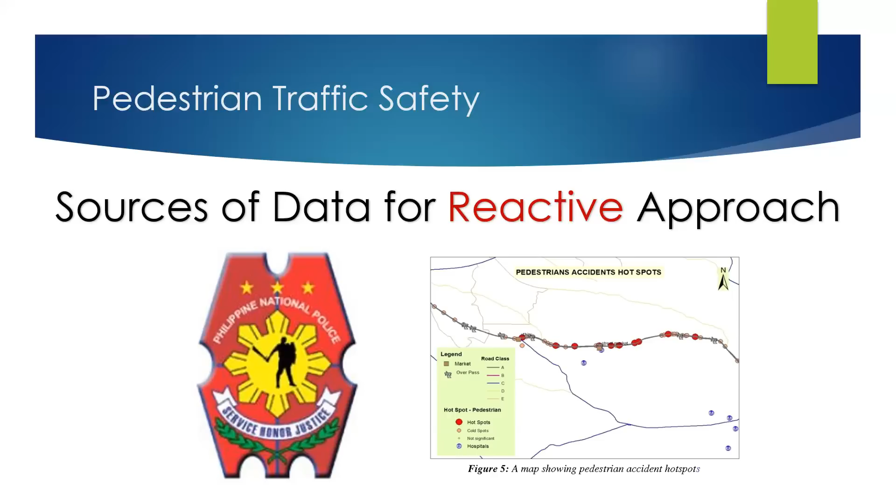However, there are some disadvantages. For one, they are considered historical data, which means they take time to build up. You can't make a study if there are many accidents only now and you want to see the trend, but it only happened this year. You have nothing to base your studies on.

And accidents are rare occurrences. It's possible that this year you have 5 accidents in the same area, but 1, 2, 3 years before that, nothing happened. So it's hard to come up with a decent study involving that area.

Because no accident really happened, or accidents were irregular in that area. Some accidents go unreported. This is not uncommon; it's pretty common even in remote places or even abroad.

So if an accident can be resolved on the spot, syempre yung police hindi na nila papakialaman yan. So pwede na nilang sabihin na sige, bahala na kayo, just resolve it on your own. So at least yung iba kasi ayaw nila magkaroon ng record dun sa police. And then yung iba rin, ayaw na nilang ma-hassle. So kung pwede na nilang i-solve on the spot, they will do that. They will know there's no need to call for police.

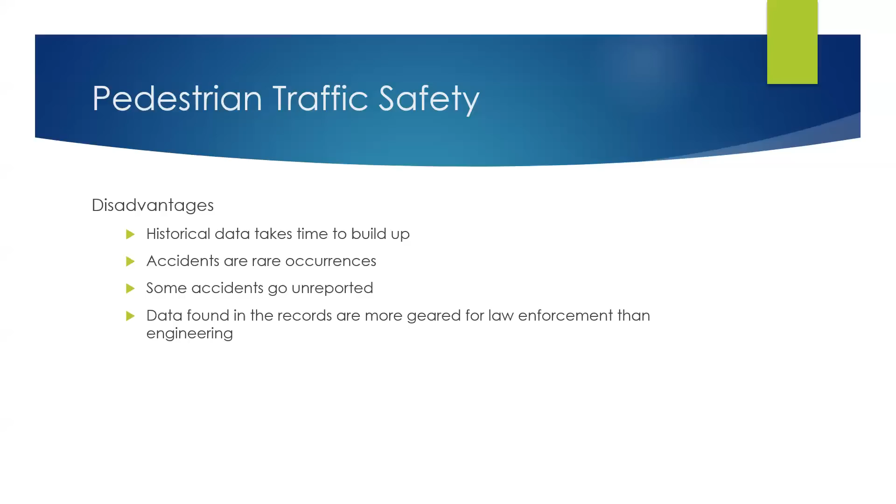So not necessary, kung tayo yung kumuha nun, siyempre yung kukunan din natin is what is necessary for us. So that's not wrong on their part. They're just doing their job using their expertise. So parang nakikigamit lang tayo ng data na nakuha nila. So there are some parts there that you can use, like yung nasabi ko nga yung mga coordinates, and then dahil nga for law enforcement, yung pagkaka-describe nila ng nangyari, importante para sa law enforcement. But sometimes hindi mo makikita dun yung mga kailangan mo. Okay? So medyo mahihirapan tayong i-filter out yung data nila.

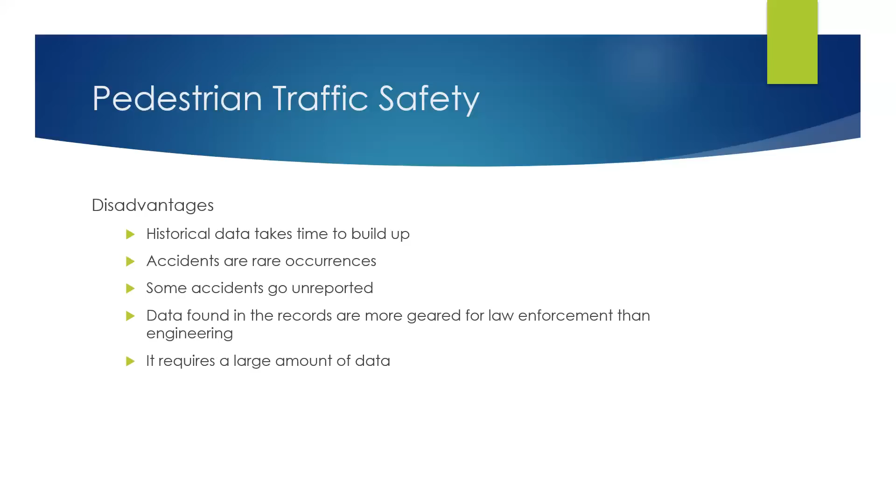And then it requires a large amount of data. So dapat maraming naka-record para magawa mo siya ng study. So now let's proceed with the gap acceptance concepts.

Okay, so the definition of gap can be described between vehicles or even pedestrians. So the first one is for vehicles. So gap is a measure of time. Tandaan nyo yan, it's time. Pag sinabi kasi natin gap, ang una pumapasok parang distance. So most of the time, gap is time. Meron kasing mga cases na tinatawag nila yung gap na gap distance. Pero kung wala namang indication, it is assumed that it's time. The time between the rear bumper of the first vehicle and the front bumper of the second vehicle. So for vehicles, ito yun. Meron tayo illustration dito kung saan makikita yung gap.

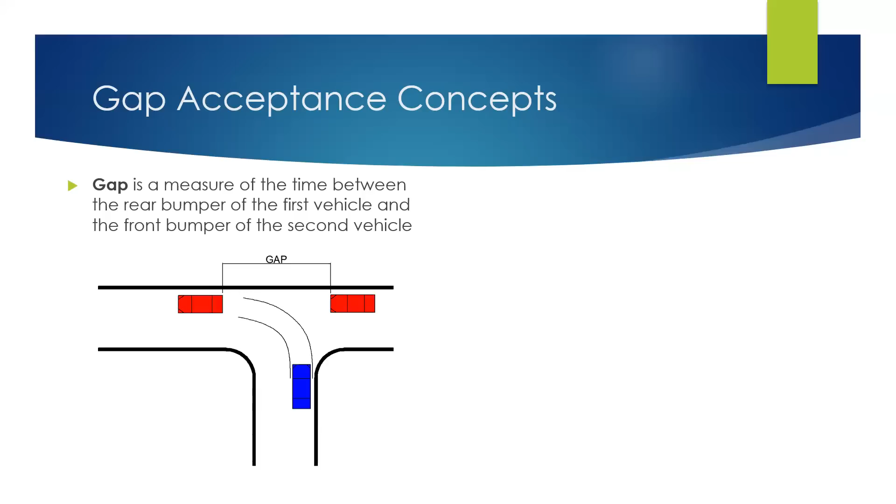And then for pedestrians, not necessarily pedestrians lang, involving the vehicle and pedestrians. It is defined as the time difference between two successive pedestrians, taken from the moment the first pedestrian has cleared the conflict area until the second one reaches the conflict area. So we have here this illustration. Makikita natin, yung isang pedestrian dyan has already cleared the conflict area, and then yung susunod, papasok na dun sa crosswalk. So yung time na pagitan nila, yun yung tinatawag natin gap.

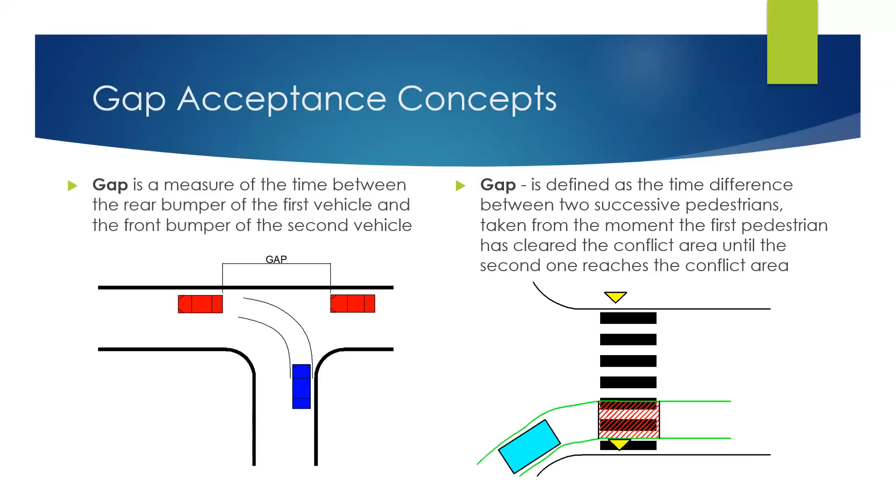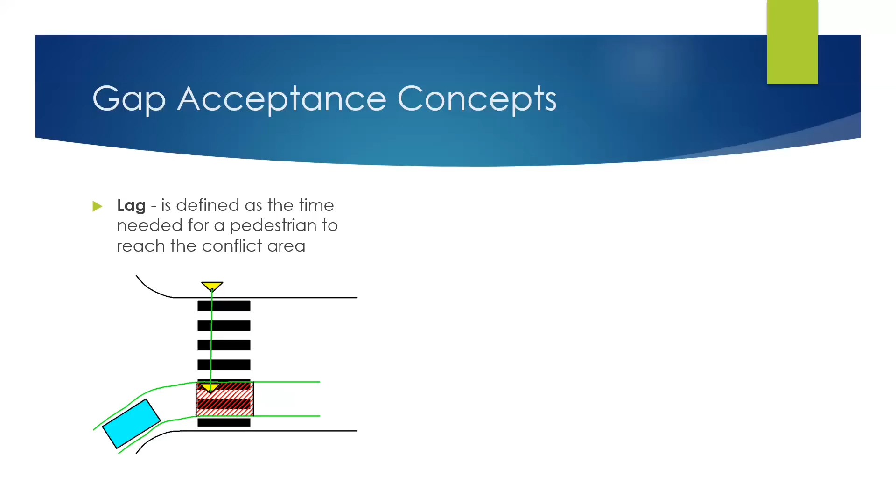So we also have what we call the lag. Lag is defined as the time needed for a pedestrian to reach the conflict area. It's possible kasi na walang nauna na pedestrian doon sa crosswalk, o kaya nakatawid na. So ang naiwan na lang na nasa crosswalk ay ikaw, kung ikaw yung tumatawid. So bibilangin na lang yung time hanggang makapunta ka doon sa conflict area. Not necessarily bibilangin pa yung time kung kailan may darating na pedestrian na kasunod mo. So yun yung lag. Sometimes sa mga studies, pinagko-combine na nila yung gap at saka yung lags, kasi technically, kino-consider na rin siyang parang gap.

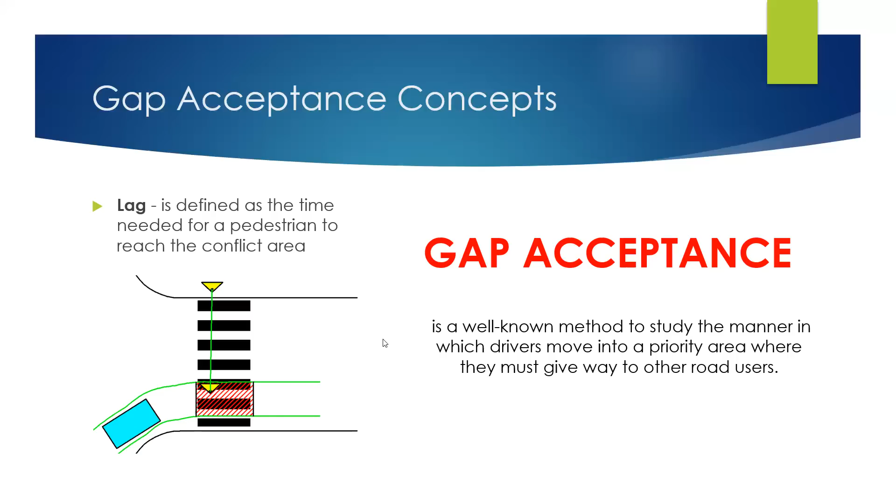So gap acceptance is a well-known method to study the manner in which drivers move into a priority area where they must give way to other road users. Road users in this case could be other vehicles or pedestrians. So gap acceptance is the ability ng driver to decide kung kaya niya bang lumusot doon sa time na allotted para sa kanya. Given na meron tayong dalawang pedestrians, kung meron siyang, let's say, 5 seconds, kaya niya bang lumusot? Or confident ba siya? Tatanggapin niya ba yon or i-reject? So this part of the lesson consists of that: accepting or rejecting gaps.

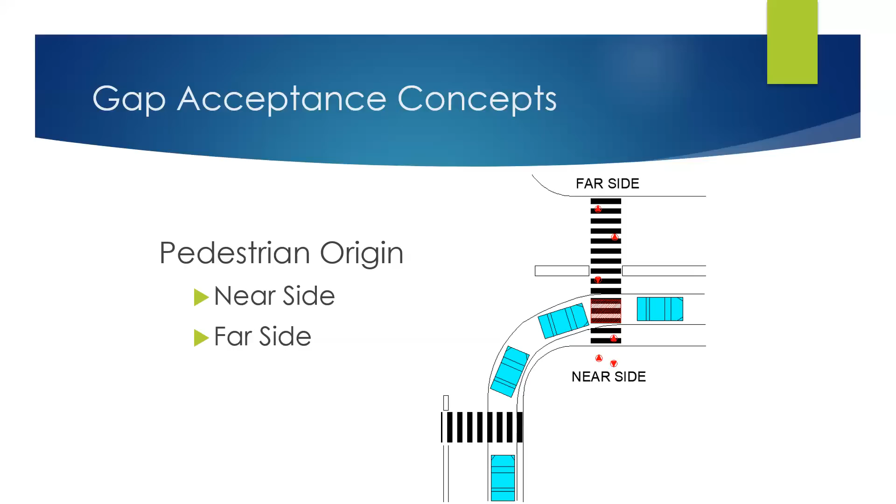Sila kasi ina-isolate nila yung mga cases, depending on the type of study. May mga study na pinagsasama na lang silang lahat-lahat; they just consider them pedestrians. But in their case, they have studies wherein they consider where the pedestrians came from and kung gaano siya nakaka-affect doon sa gap acceptance ng mga drivers. So these are the following cases.

So we have lags from the near side of the crosswalk. So ito yun, for example. Nanggaling siya sa near side, yung pedestrian. Lag siya kasi wala naman siyang naunang pedestrian. And then we also have the lags from the far side of the crosswalk. Okay, so ito yun.

And then gaps between two pedestrians approaching from the near side of the crosswalk. Parang yung kanina lang na lag, kaya lang meron nang nauna sa kanya. Parang lulusot siya sa pagitan nila. And then we also have gaps between two pedestrians approaching from the far side of the crosswalk.

And then for the last one, gaps between a pedestrian approaching from the near side of the crosswalk and another one approaching from the far side of the crosswalk. So salubong. This is an example. Makikita nyo dyan yung distance nila pag malayo. But in reality, dahil salubong sila, yung gap time nila could be deceiving, kasi mabilis lumiliit yung space.

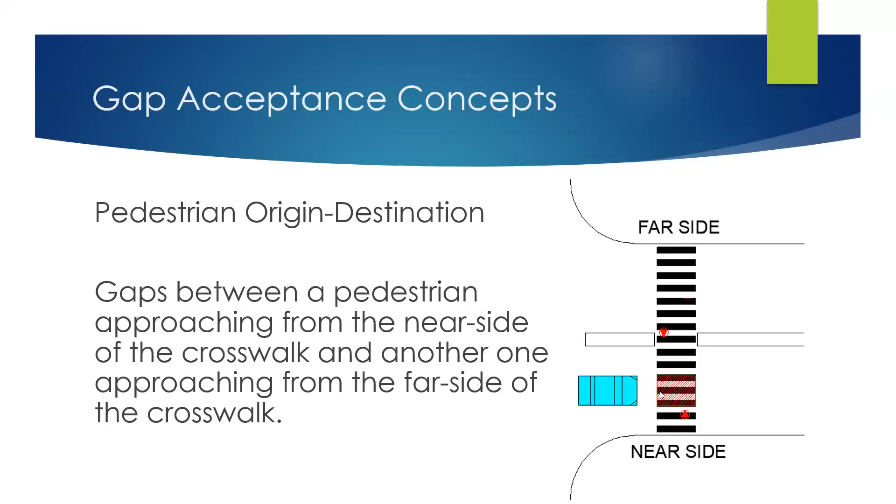So here is an example. This is taken from a software called Kinovea. Kumuha lang ako ng sample video from YouTube na gagawin natin ng analysis. Itong Kinovea is just a free software to process videos. Technically, it's not meant to be for transportation; it's for sports. But some functions of this software could be used to analyze yung mga transportation measures natin. In this case, ginamit ko lang to for illustration.

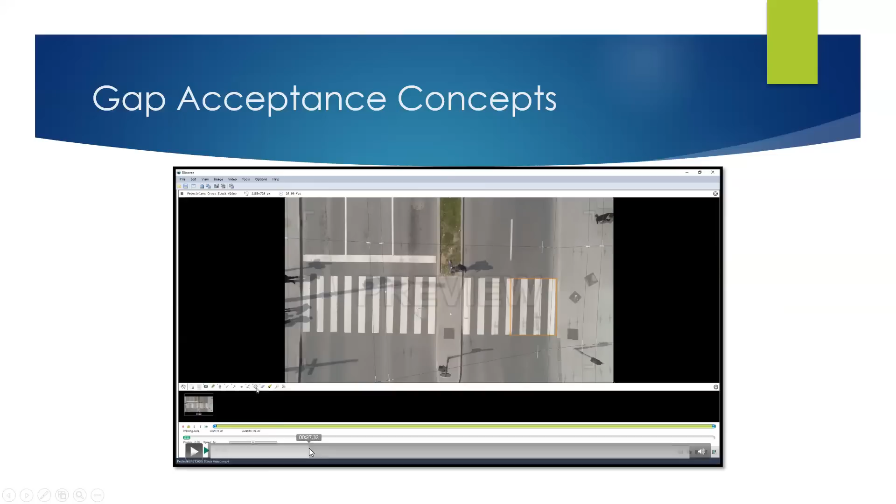Recording gaps does not necessarily need video processing software, but sometimes it makes it easier, lalo na itong software na to is just free. So dito sa video, nilalayout ko lang yung conflict area for visual purposes. Then fast forward natin. Naglalagay ako ng stopwatch para ma-measure natin yung gap acceptance. Pwede rin kayong maglagay ng stopwatch for the gap rejected. It's all up to you.

Okay, i-start ko to, sorry. So i-start ko tong timer kapag nakatawid na yung mga pedestrians. Itong sample video natin, hindi masyadong malawak yung pinapakita, so hindi natin nakikita na nag-approach ang vehicle. I just assume na naglakad sila, meron ng vehicle na papasok dito sa crosswalk na dadaan. So let's see. The moment they step into the crosswalk, simulan natin yung timer.

Ito nasa left side yung titignan nyo. Okay, nagsimula na siya maglakad. Start ko na yung stopwatch. And then, hindi ko siya titigil kapag may dumaan na. I-continue ko pa rin siya kasi for every pedestrian, posible na maraming mga vehicles yung nag-accept or nag-reject. Pakita na lang natin dito.

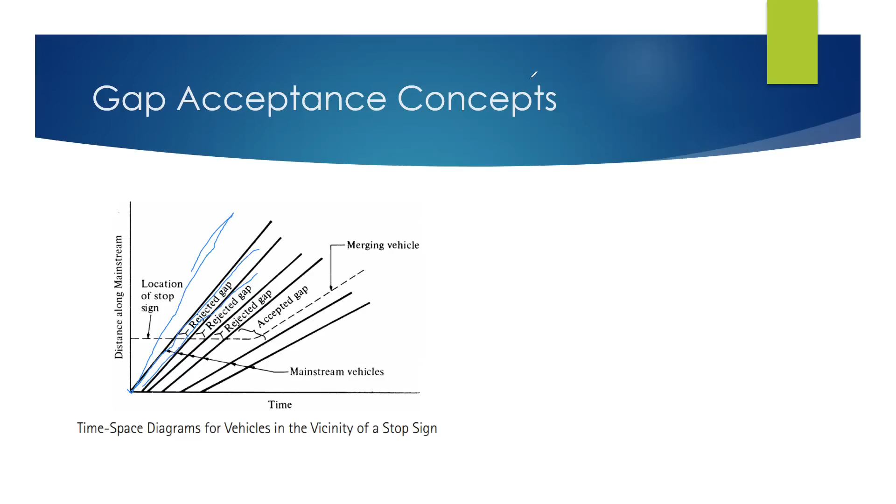So, mas pataas, the term steep ba yun? Mas steeper yung slope, that means the vehicles move very fast. Ibig sabihin, they cover a lot of distance in a very short time. So, ganun yung indication ng isang time-space diagram. And then, kung gusto nyo siya maintindihan, meron tayong illustration dito.

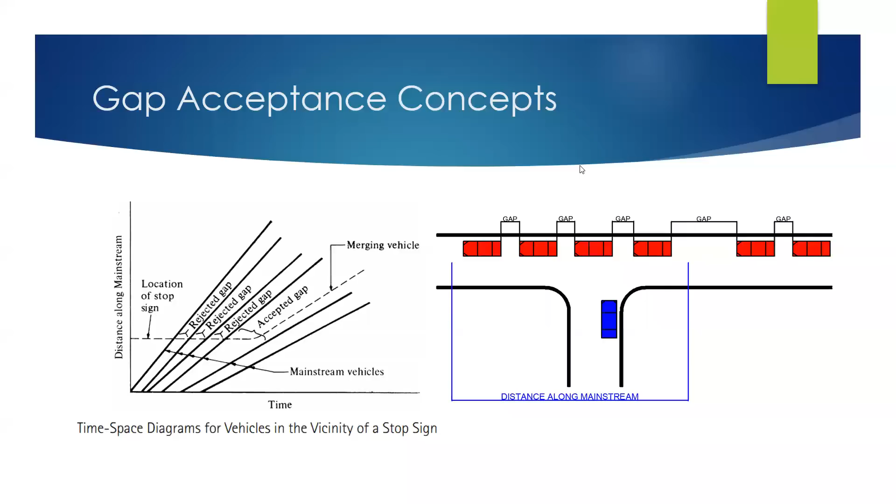So let's clear this all up, and then let's proceed dun sa next part. So this is an example of the table for the gaps. In the first column, we have the length of the gap, which is measured in seconds. You just have to filter them into time intervals of 1 second. Or if you want to be strict, 0.5. Pero this is already okay.

Hindi natin i-record dyan paisa-isa na 0.17, 0.16, 1.25. It will make the analysis much harder. So you just input the gaps that you found in your study. Siguro dun sa study that is used for the example, hanggang 10 lang yung gap. And then you count the number of accepted gaps less than t seconds. Meron bang gap na mas maliit pa sa 0? Wala naman nag-accept. Kung meron man, nabangga siya.

And then, let's say 1 second. This is not a very realistic graph. This is just used for illustration purposes. Do not take it seriously. 1 second na gap, masyado siyang maliit. So may nag-accept na 2.

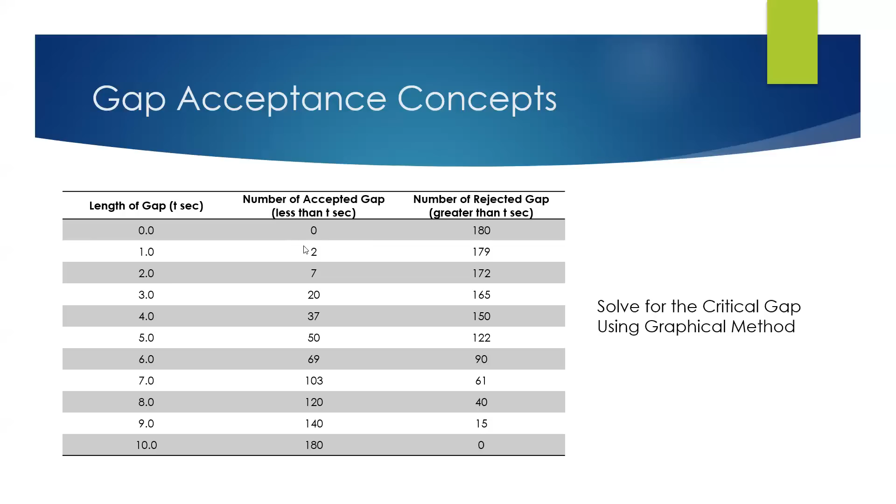Okay, so now let's try to solve it. I have a copy of this file since I made this table myself, so I can copy paste it into Excel and it will give me this graph. If I were to do it graphically, it's easy - just take the lines, project them downward to their intersection, and I can get the critical gap right away.

I will also set up the requirements to solve it manually - these are the upper and lower boundaries, same on the other side. So to determine the critical gap, the answer is 6.3 seconds based on this data. Let's try doing it manually. While you're still working on it, I will try my best to solve this manually. Wish me luck.

We have an hourglass figure here. Let's assume this is perfect. Let's assume the upper boundary is approximately 90, then the lower boundary is approximately 68. On the other side, we have around 104, then the lower boundary is around 62. Let's assume this is 1 full second.

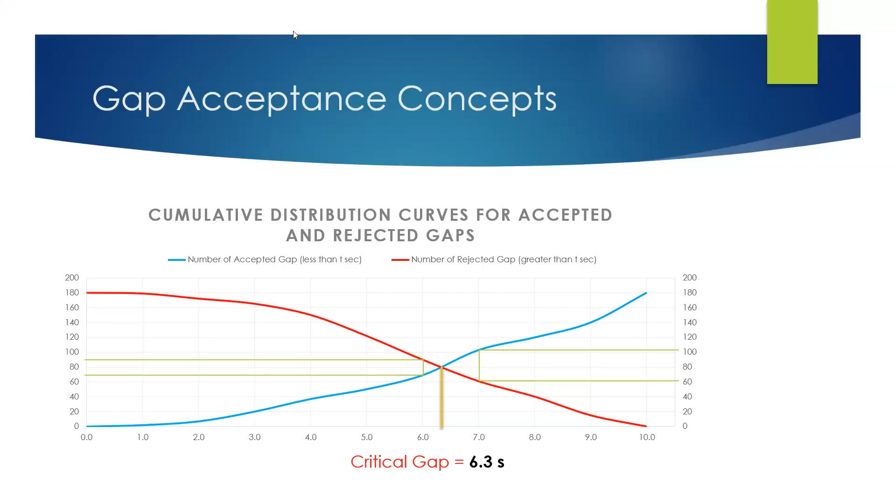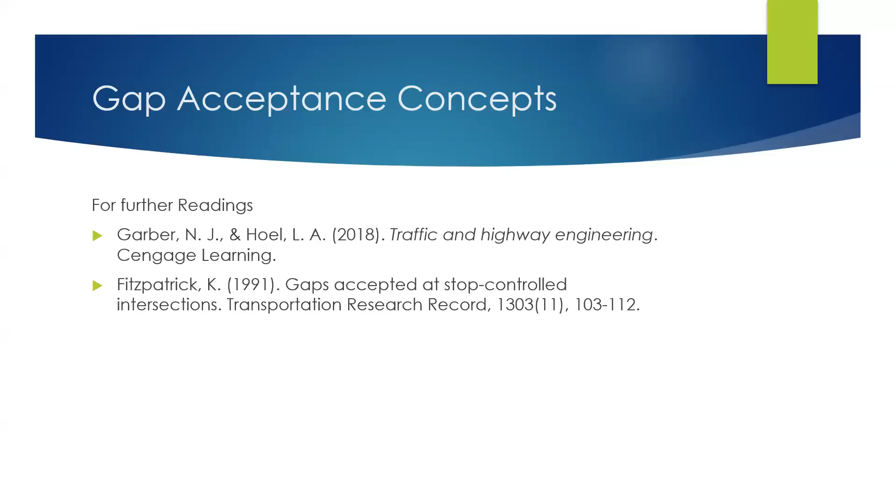Okay, let's play. Oops, I cancelled it.

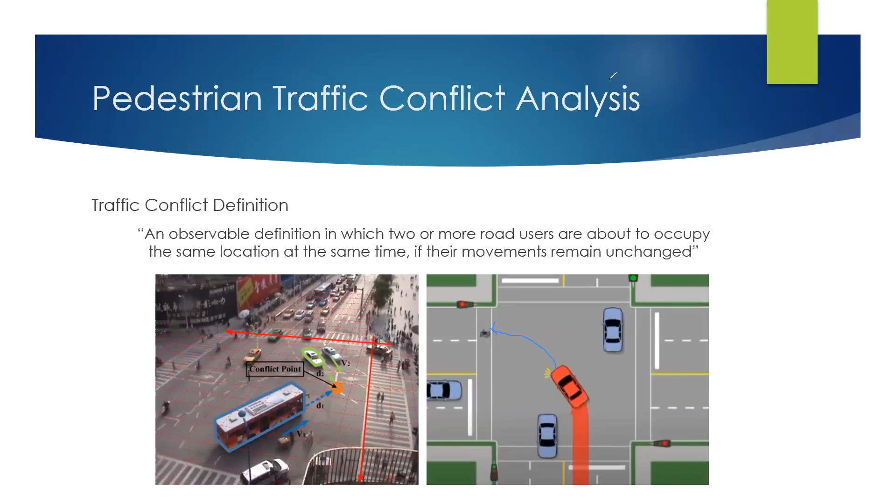Okay. So we have what we call the Swedish traffic conflict technique. So itong Swedish traffic conflict technique, not necessarily originated from Sweden, no? Sabi nung isang research, originated from General Motors Laboratory, and then na-refine lang ng Sweden, no? So kaya naging Swedish traffic conflict technique. So according to the Swedish traffic conflict technique, a collision course is a necessary condition for a conflict. So nabanggit ko naman kanina.

So collision course implies that unless one of the road users takes an evasive action, a collision will happen. So yung tinatawag dito is evasive action, no? Kailangan natin yan tandaan kasi that's a very important part of the Swedish traffic conflict technique. So the severity of a conflict is defined at the moment when one of the road users start taking an evasive action. Yun na naman, lumitaw na naman ang word na evasive action. So the road user who took an evasive action first is called the relevant road user.

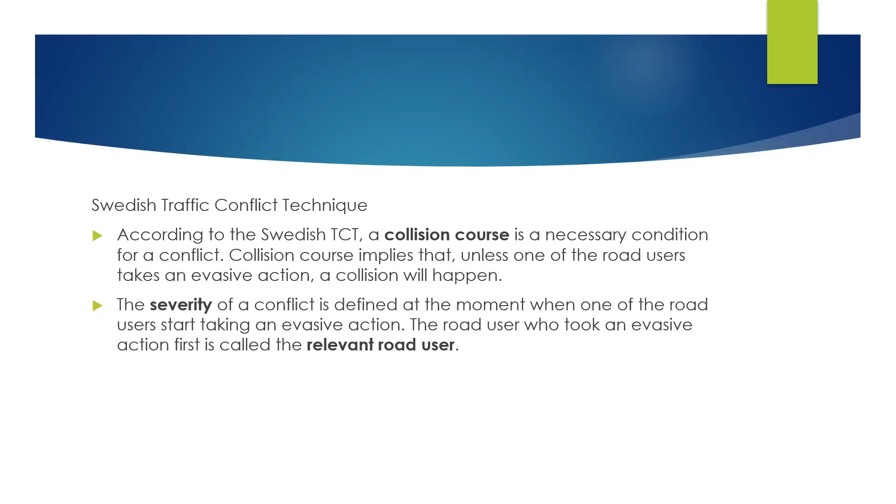Okay? So conflict severity is based on two indicators. So time to accident, which is the time remaining to a collision when the evasive action, so nandun na naman yung word na evasive action, is taken by the relevant road user. So road user, yung unang gumawa ng evasive action. And then conflicting speed, the speed of the relevant road user when he or she takes the evasive action. So, yung bilis. So, time and speed lang yan, dalawa.

So, siguro narinig nyo na yung time to accident at saka time to collision. So, pareho lang ba sila? So, the answer is, they have similarities. But technically, they're not the same. So, hindi parehas yung time to accident, time to collision. So, they have some differences between them. But they are sometimes used interchangeably because sometimes yung time to accident mismo, as in the time itself, it's possible to be equal to the time to collision. Okay?